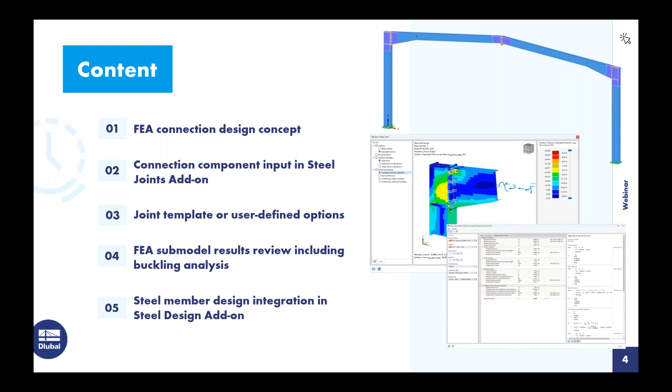So we might be wondering, why would we utilize FEA for steel connection design? Obviously the biggest benefit is going to be the design of non-standard or unique connections. Most likely you have a solution for very basic or standard connections - a lot of software offers this, or even hand calculations. But when we look at this connection over here on the right-hand side with a lot of different components going on, it becomes a little bit more difficult.

So this new steel joints add-on within RFEM allows us to consider the components and the members both in plane and out of plane in one single FEA model. We also can consider complex loading. If we are modeling the entire steel structure within RFEM, we can apply any of the member loads or unique loading scenarios to the structure itself. The member internal forces at the member ends at the joint will simply be used for the connection design, so no need to integrate those member end forces into an external program. Again, everything is done within this single file.

The submodel is automatically generated underneath the hood of RFEM, so this really doesn't require an expertise level knowing how to create these FEA models. They are rather complex, but if you just have a general FEA knowledge, you can go ahead and utilize this capability within the program.

We also will perform the AISC design checks of these connections for our bolts, our welds, and our plates, but we will take it a step further to create a second submodel to carry out the buckling analysis. So we'll be able to view the different eigenmodes and failure buckling modes of this connection, as well as the critical load factors. We'll see that a little bit further in the example today.

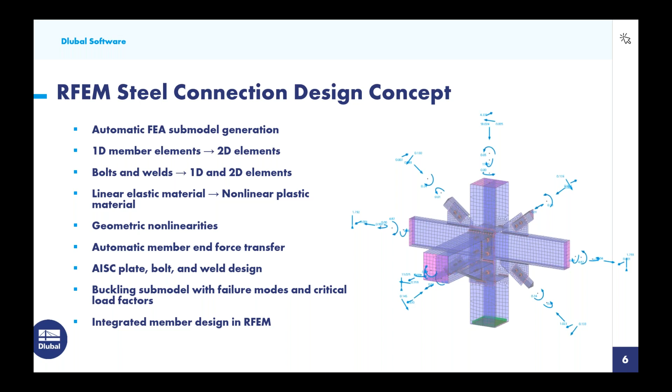And finally, the integrated member design within RFEM. Of course we can get the connection design, but also the ability to design the members themselves - and not just steel, but any material that we offer. So you could combine this connection design with concrete, aluminum, cold form steel, even topics like fabric tensile structures. We could do the steel connection design within that same file.

Okay, so we will begin then in RFEM here with our initial example. When we create a new model, we will give it a model name. The type of model here is going to be in a 3D environment, so although we just have a simplified 2D frame here, we still are accounting for all forces in and out of plane.

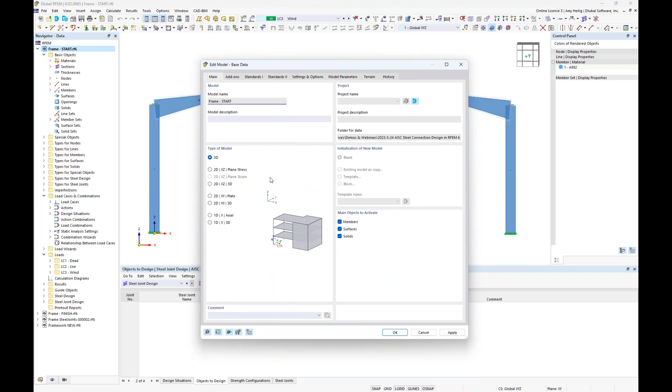Under the second tab, so for those of you who are not familiar with our program, RFEM is the base program. This is where we can fully model, load a structure, and get the full static analysis. But if we want to do a more advanced analysis like dynamics, or we want to do design according to the various standards, this is where we would need to activate these optional add-ons. So you would purchase the add-ons that are specific for your project design.

Now for today, we'll be activating here the steel design. So this carries out the steel member design according to the AISC, and of course the steel joints for our connection design. Under the third tab, we will generate the load combinations automatically according to ASCE 7.

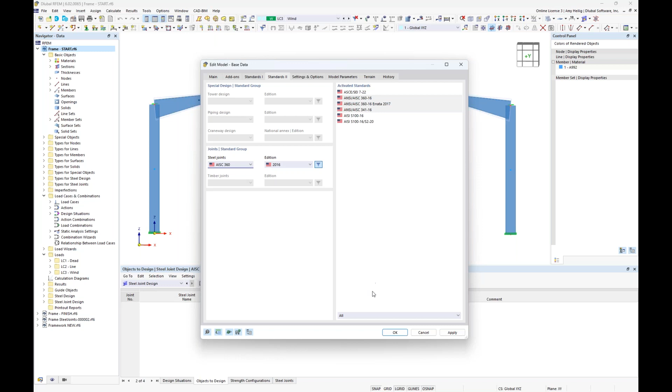We have added the 2022 standard, so that's available here. The steel member design will be carried out according to the AISC 360 2016. And under our fourth tab here, Standards 2, the steel connection design will be carried out also according to the AISC 360.

So once all of this information is input into our base data, as you can see here, for the sake of time, I've already modeled this simple 2D frame here. So let us just quickly go over some of the information already shown. Well, if we turn this into wireframe view, these members, as I mentioned, are just standard one-dimensional elements.

So this is pretty usual for any FEA program, that when we model columns or beams or braces, they're represented by this single line only. But if we turn this into rendered view, we get a better understanding of what this line represents.

Now, we also have here the materials assigned to these members, and currently these are all A992 linear elastic materials. We also have our cross sections.

You can see here the columns are assigned as W14 by 48, and for my beam members, these are W12 by 35s. But I also have applied a small taper at the beam member end.

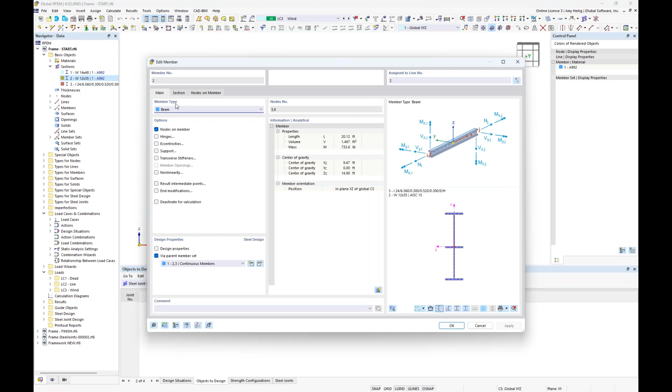So if we double click on this member to go into the beam dialog box, under the second tab here, section, we do have the ability to set a taper at the member start or the member end and other multiple options here. So I'm currently applying this taper at the first 25% of the member length.

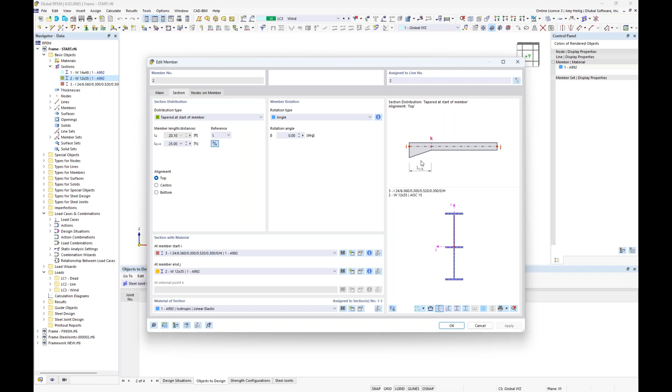And we also can align the taper to the top of the member, for example, and this picture over here will update accordingly. So as mentioned, the beams are primarily W12 by 35, but where this taper occurs at the member start, I took that W12 by 35 and created it as a user-defined section to simply increase the depth.

So that's a little bit about what's going on with our members. Turning this back into wireframe view to quickly explain our support conditions, we have a fully fixed support down here at the bottom, which was applied by utilizing the assign nodal support up here in my toolbar. And also, because we are working in a 3D environment, I went ahead and put some additional spring supports up here only in the lateral global Y direction, to account for maybe additional members framing in to give that lateral stability at the top of our frame.

And finally, we want to cover the loading. So we have 3 simple load cases for today, and we can see these within our drop-down box up here at the top. If I turn on my loads, my dead load is 0.5 kips per foot, applied as a member load.

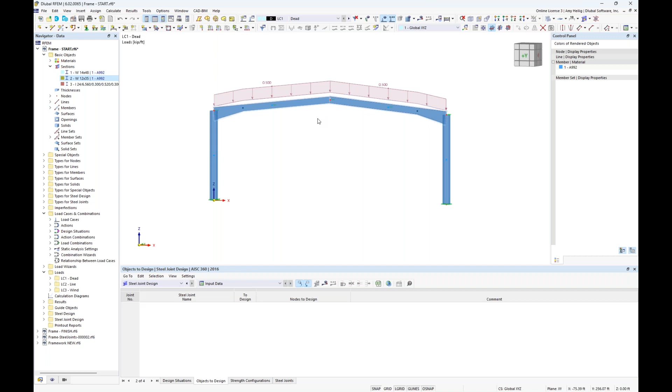When we look at our live load, same concept here, just with a reduced magnitude of 0.3 kips per foot. And then a very simple lateral load here for our wind load case with 0.3 kips per foot at the front side and 0.15 kips per foot at the rear side.

Going into our load cases and combinations dialog box, we will once again see here under our load cases our 3 simple load cases for today: dead, live, and wind. Category was set accordingly to the ASCE 7.

The program is automatically going to generate 2 design situations for us. We have here our LRFD design situation and our ASD design situation. This is really nothing more than just grouping together all of our factored load combinations according to the ASCE 7 for this first design situation. And we can click on this little info button here to see the code references to those load combinations directly.

Now notice that these are used within these optional add-ons that we turned on: steel design and our steel joint or connection design. I will be utilizing these design situations. I'm carrying out my design according to LRFD for today.

Now we also have this second design situation, which is simply grouping together our unfactored load combinations. I'm going to use this for my serviceability checks for my steel member design, but we really don't need it for our connection design because serviceability is not something that we're going to check.

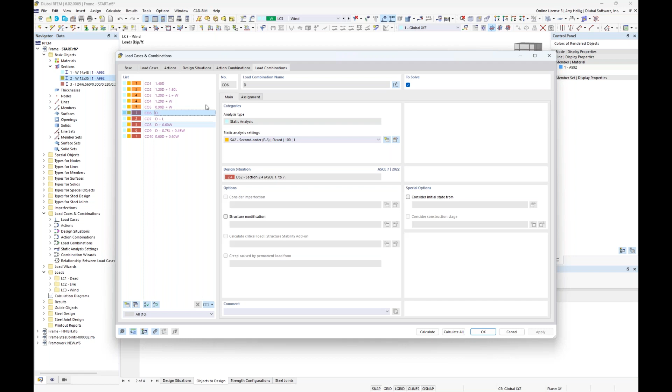And finally, under the load combinations, you can see here the individual load combinations listed out based on the load cases I have defined. All of my factored load combinations are shown here in orange, which belong to that first design situation. And then we have our unfactored load combinations shown in red that belong to the second design situation. So just keep these design situations in mind, we'll come back to them a little bit later on.

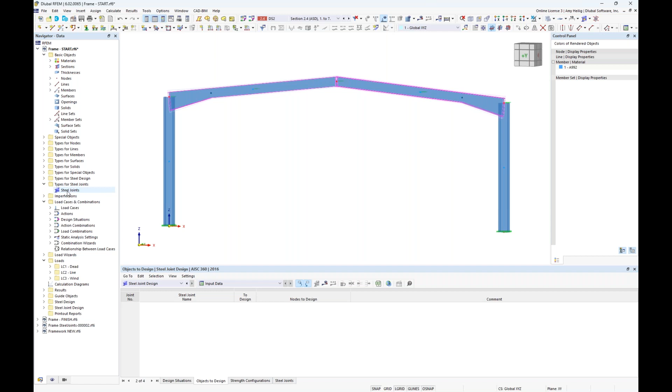So now that we have fully reviewed this model, let us begin by defining our first connection. So because I have activated the steel joints add-on under my base data, we now have a folder option over here on the left called types for steel joints. Well, currently this is empty, but I can right click to create a new steel joint.

And initially, I want to select the node that I would like to apply my first connection. So we can graphically select node number 6, or I could directly input the number here into this dialog box. Both of my members were automatically brought in.

Looking at this second tab, remember that we are going to extract out this submodel for our connection design and run it completely separate from our steel frame that's happening here in RFEM. Because of this, we need to fully support one of these members in that submodel, so we'll go ahead and utilize the support for the beam over on the left.

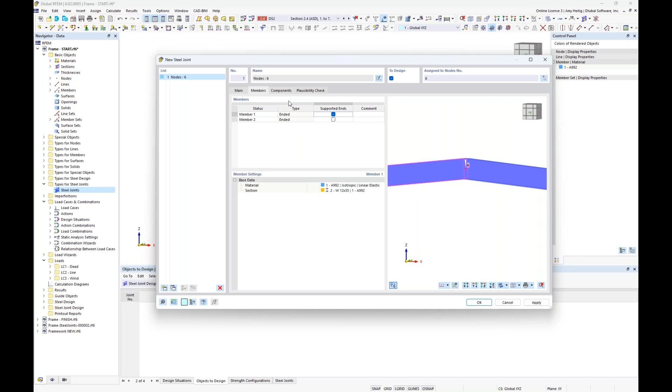Now the type is set to ended. This only means that if all of these members simply end at this connection, then the type would be set to ended. In another scenario where we maybe had a continuous column passing up through here, but it was modeled as two separate members back in RFEM, then we would have an additional type option available in a dropdown called continuous. Under the Components tab, this is where we begin to build up our connection components.

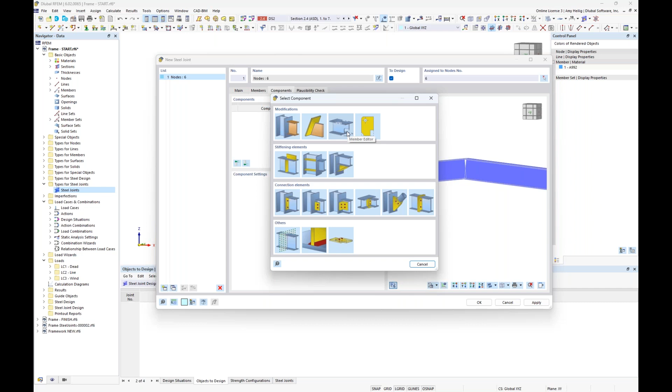We could certainly individually do this with our connection database, our component database. We see each one of these components that we can individually input, such as end plates, fin plates, cleats, or maybe plate-to-plate connections for beam splices. We also have stiffeners and haunches, and then some additional modifications that relate more to the geometry, so we can make member cuts, or add in openings or notches into our beam elements.

But rather than inputting in these individual components, we could also take advantage of our library options. Within these joint template library options, we have 4 general categories, including rigid connections, pin connections, truss connections, and brace connections. Beginning here with the rigid connections, we have additional subcategories such as beam to column, and so on, and within these subcategories, we have additional template options.

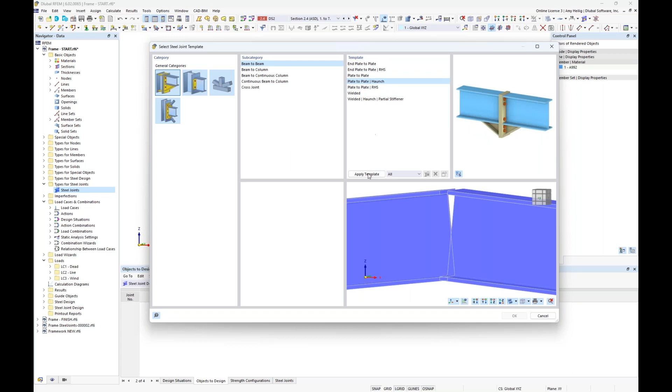So looking at beam to beam, we have an end plate to plate, and an end plate to plate with a rectangular hollow section. For today, we're going to utilize this option: plate to plate with a haunch. When I click apply template, it's automatically going to apply these components from this library to my specific members within my RFEM model. So I can click OK, and now we see these individual components listed out and applied again to the members within the RFEM model background.

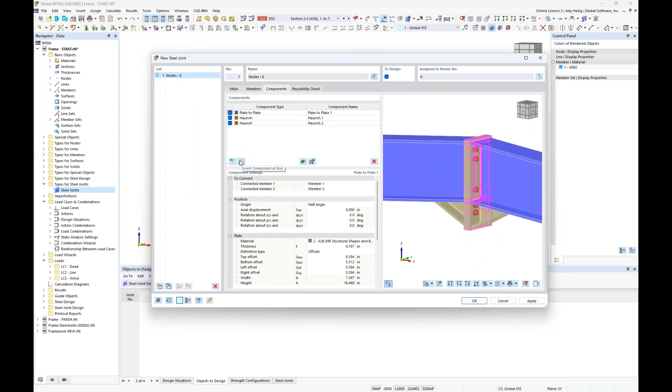Now, we could certainly add on with the individual components and just use the library as a starting point. We'll certainly need to make some modifications to our geometry, but once you have your connection set and you utilize this connection quite often, it's always recommended to save it under your own user-defined template. You can give the connection a name, set the filter categories and subcategories, and now that connection will always be available for any future RFEM model. That could certainly be helpful if you don't want to redefine the geometry changes or components every time.

So starting off with the first component, you can see here it is plate to plate. We are connecting both members 1 and 2. We can make modifications to the position, but we'll go ahead and leave all of this as default. Now we do need to define the material of these plates. I already have A36 defined within my RFEM model, but if you did not, you could just access our material dialog box with these 3 buttons here.

Within the material dialog box, we can further activate the material library. Over on the left, utilizing our filters to steel, to the AISC 360, then we could go ahead and choose whichever relevant steel material we'd like for this particular component. Again, utilizing the A36 that's already been defined, I will modify here the thickness of my plate. So we can go ahead and change each plate to 0.5 inches thick for a total thickness of 1 inch.

And now we need to define the plate offset. The offset just means what is the distance from the top of the plate to the top of the flange, and then the bottom of the flange to the bottom of the plate, as well as left and right. So starting off with the top offset, I'm going to modify this to actually a negative 0.375 value. I'm going to drop this plate down below the top flanges here on my beam in the event that we have some type of sheathing material that we don't want it to interfere here with these plates.

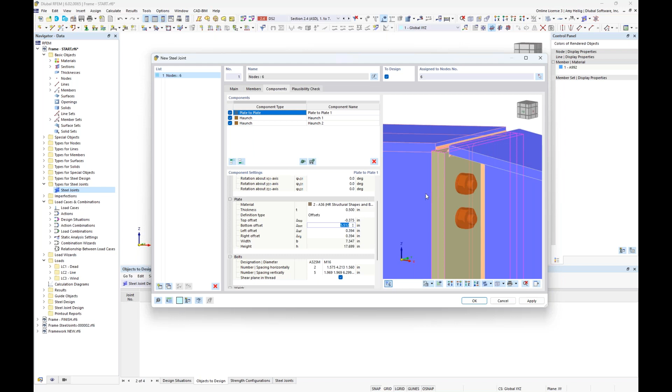As far as my bottom offset, we'll modify this to around 5 inches. Then we have the offset on the left and right, which I'll set at 0.5 inches for the left, hit enter, and 0.5 inches on the right. Now the dimensions of the plate will automatically update here.

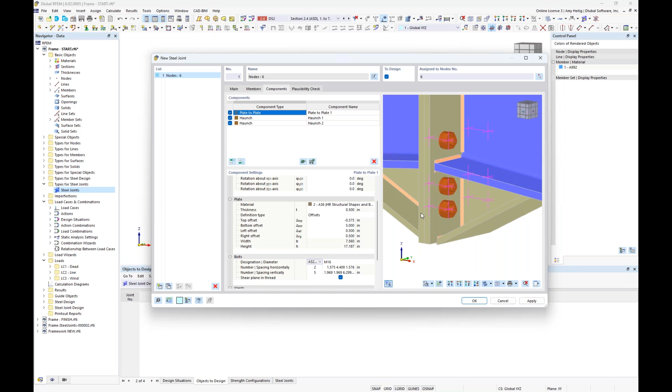Next up is our bolts. We have here the designation of the bolts within our dropdown. We'll select A325, and in the dropdown box next to this we can select the diameter, choosing 3/4 inch diameter for our bolt layout today.

Then we have the number of bolts in the horizontal direction as well as the spacing. Currently we have 2 bolts in the horizontal direction, one on the left and one on the right, so we'll stick with a total of 2 bolts. The input in our second column is simply the horizontal spacing. The first spacing to input is the distance from...

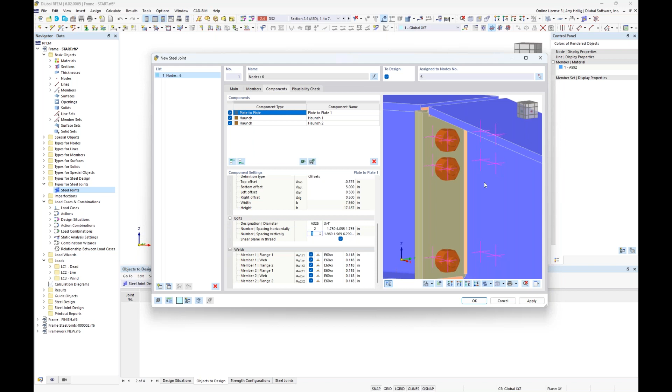...the edge of the plate to the center of the first bolt, so I can input 1.75 inches and hit space. The next distance is from this bolt to the bolt on the other side, which is 4.055. If I hit enter, the program is intelligent enough to set the additional dimension from the center of the bolt to the edge of the plate. Keep in mind the program will attempt to center these horizontally, so you may not need to make changes, but if we want to adjust that spacing, this is how we'd do so.

As far as the bolts in the vertical direction, currently we have 5 bolts, but I'd like to reduce this to 3 bolts instead. Once we update this, we need to adjust our spacing.

So we have the vertical spacing. The first input option is from the top of the plate to the center of my first bolt, which will be 3.5 inches. I hit space. The next spacing is from this first bolt to the second bolt, which will be 5.5 inches. I hit space again, and lastly define the spacing between bolt number 2 and bolt number 3 as 5 inches. I hit enter, and the program will populate the last spacing from our bolt down to the bottom of the plate.

Now, is the thread located in the shear plane for our bolts? If so, we leave this option turned on. If not, we uncheck it.

And finally we move on to the welds. We can see these welds are labeled within this first column, but as I scroll through them they're also highlighted graphically. If I didn't want to apply any one of these welds, I could simply uncheck it here, and that weld would be taken away from this particular connection.

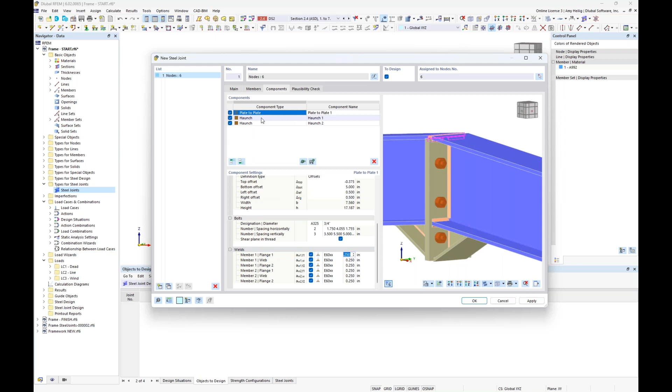That sums up our first component and any of those geometry changes. We now want to move on to our second component, which is a haunch. We see it's highlighted over here on the left-hand side, and we're currently referencing member number 1 and the particular web.

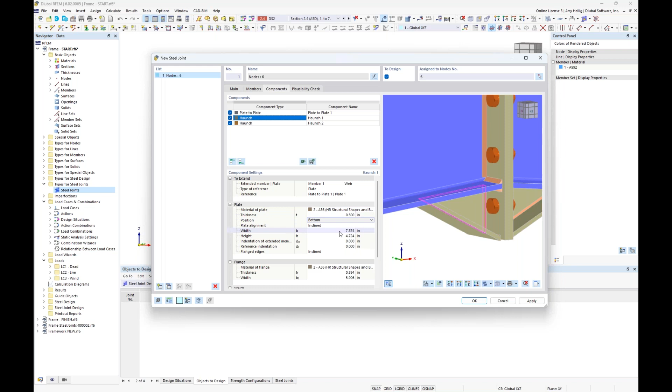And we want this haunch to be extended to our plate shown here. The material is set to A36. We do want to modify the thickness to maybe 0.5 inches. We can also modify the width and the height. So I'll modify the width to 12 inches, and we should see that graphically displayed here. The height is going to be 5 inches. And you'll also see that the program automatically included a flange here as part of my haunch.

If I wanted to get rid of that flange, I could go ahead and use my drop-down box here to select the no option, and that flange should disappear.

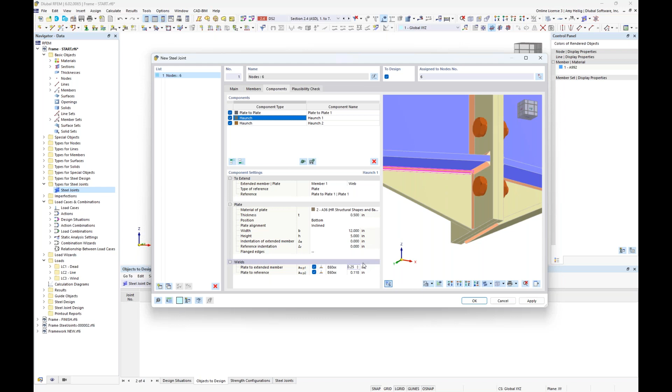Now, finally, we have our weld input for the haunch itself, and we have two welds, which we'll leave as a default double fillet weld on either side. Our first weld is on the underside from the plate to the bottom flange, where we will modify the throat thickness to 0.25. Our second weld is from the haunch to this end plate here, which again we will modify that throat thickness to 0.25 as well. So looking at our haunch on the left-hand side, we're complete with this second component.

We move over here on the right-hand side, and we want to make those exact same changes that we just did to the left-hand side. So we'll modify the thickness to 0.5 inches. We want to modify the width to 12 and the height to 5 inches. And then we will also want to select no flange here in our drop-down. And finally, we will modify the throat thickness to 0.25 for both of those input options.

So realistically, this connection is now complete. And again, if you utilize this connection quite often, save it to your user-defined library so you can pull it open with these modifications already set.

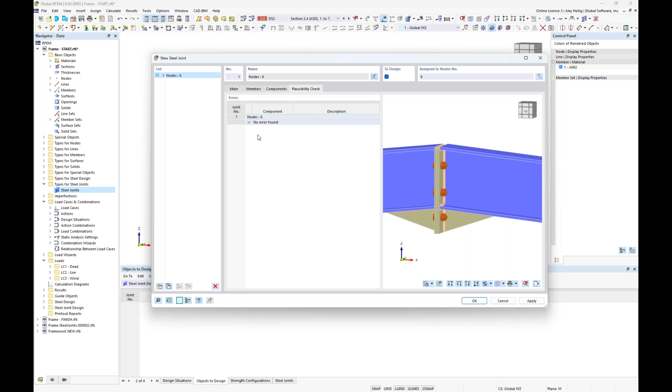The final thing to do with any connection is to check out this fourth tab, the plausibility check. So we see here it's a green checkbox with no errors found. If we had any issues, such as maybe bolts overlapping welds or plate elements, or maybe a weld extending beyond a plate, these would all be flagged here so that we could take care of those errors before we move forward with the calculation.

So now that this connection is complete, we can click OK here. And what we should see is that graphically, we're going to represent this connection here within the main RFEM model.

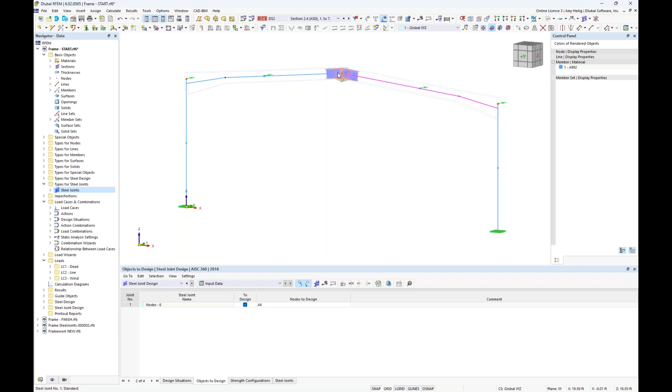Now, to explain a little bit further about what's going on, you'll notice that when I turn this to wireframe view, we still have those one-dimensional members. Notice that these members are still framing from node to node. We're not going to cut off this one-dimensional member where this connection starts. Really, this is just a graphical display of that model that will be acted out and completely calculated separately from this RFEM model. But it is nice to view in a little bit more detail exactly what's going on.

Also keep in mind, a common question is that the member end forces for this beam will actually be taken at this node. They are not taken at this distance away where the connection will begin.

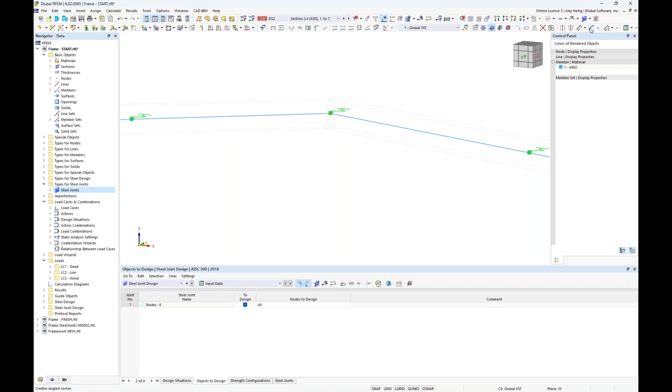Going back then into the rendered view, we can see this connection here with all of the available components, the geometry changes that we just input. Now, with the display of our connection, we also have an additional option up here in our toolbar where we can completely hide that joint model with this dropdown if we're not interested in seeing it. We also have this simplified joint model, which is just represented by some box type symbols here. And finally, we have the detailed joint model, which is currently default and turned on.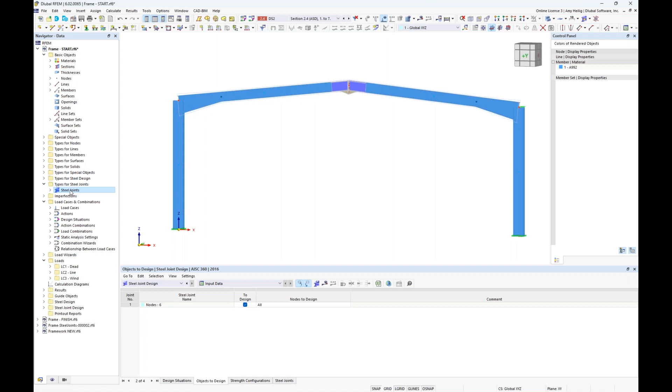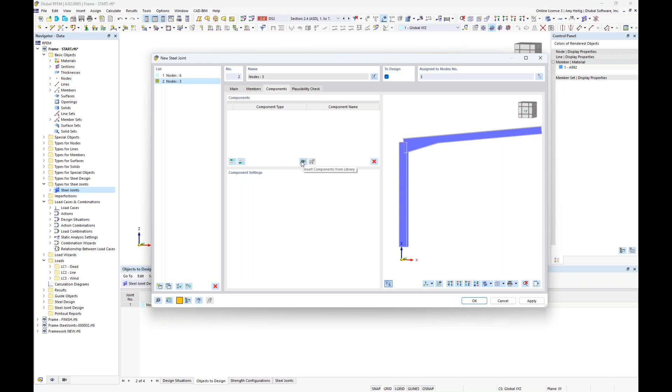So now that we have defined this first connection, we would like to move on to our second connection, which is going to be the tapered beam to the column. So we can again right click over here in the types for steel joints to create a new steel joint definition. We want to graphically select node number 3. I click OK. The two members are automatically imported here, and under the second tab, if you remember, because we're creating that FEA submodel, at least one of these members needs to be fully supported. So we'll go ahead and leave the column as fully supported. Under the components, we will take advantage of our library option here.

And this time under our rigid connection, we want to modify this to a beam to a column. Within the additional template options, there are many different options, including cleats, maybe an end plate. For today, we want to utilize the column with stiffeners. I'm going to hit apply, and yet again, we should see these individual components applied directly to my model.

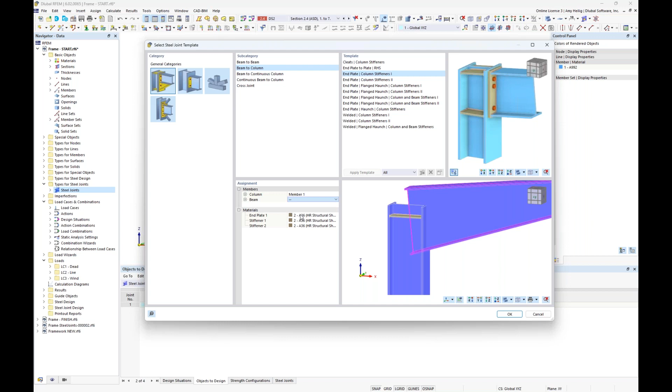I think we could all look at this connection and agree that this certainly does not look correct. This is really just an issue of the program not knowing which member is the beam versus which member is the column. That's controlled with our options on the left. So in our dropdown for our column, we want to change this to member number 1, and our beam element we want to specify as member number 2. Now this connection should look quite a bit better. So we click OK.

Just like what we saw with our previous joint, we will now see all of those components individually listed out here. Let us begin with the end plate. You can see here with the end plate, we are taking member number 2, which is that tapered member, and connecting it to the reference member number 1. Steel A36 will be utilized for the material. If we want to modify the thickness, we can input this as 0.75.

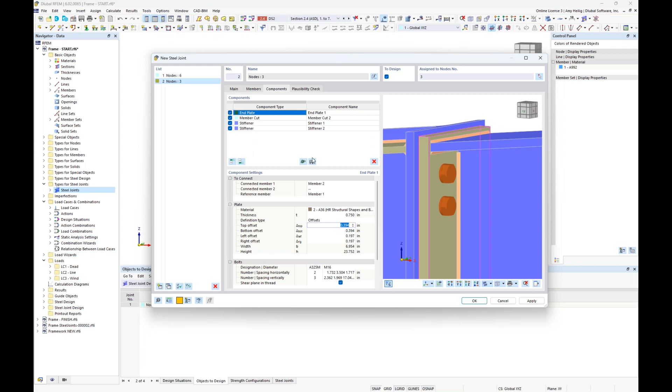Very similar to our last plate element, we would want to define the offsets. Looking at our top offset, remember the top of the flange to the top of the plate, we'll go ahead and modify this to 0.5 inches. When we look at the offset at the bottom, we will modify this to 1 inch. And then we have an offset on the left and right hand side of those flanges, and we'll set this as 0.25 on the left and 0.25 inches on the right.

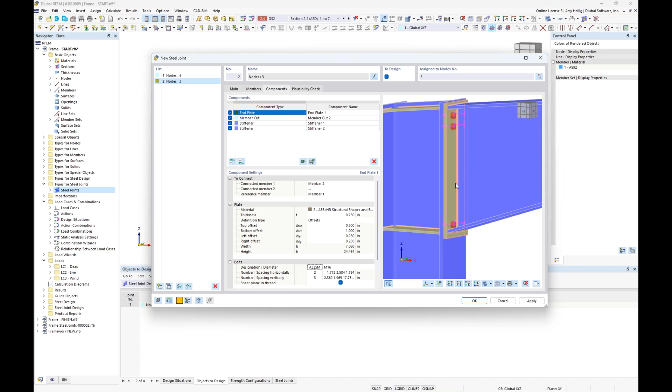Now looking at our bolts, again, clearly we need to make some modifications here. We will be selecting A325 from our dropdown. The diameter of the bolt is going to be 7/8 inches. We are going to leave this as 2 bolts on either side, so 1 bolt on the left, 1 bolt on the right. The program has centered these, so I will leave these as default options now.

As far as the vertical bolts, currently we have 3 shown, but I want to increase this to 4. Once I input the 4 bolts, we'll make some modifications to our vertical spacing as well. The first input option is from the top of the plate to the center of the first bolt in the vertical direction, which will be 3.5 inches. I hit space on my keyboard. We now need to define the spacing from bolt number 1 to bolt number 2, which will be 5.5. I'm actually going to apply 5.5 inches to the additional spacing 3 times between all of these bolts. I then hit enter on my keyboard, and we see all of those update graphically here.

We'll leave the shear plane and thread turned on. And finally, we have our welds. So we have the weld at the top flange, again leaving the fillet weld on either side as default with E60 strength. We'll modify the throat thickness to 0.25 once again. We take a look at our weld at the web here, and we'll go ahead and modify this throat thickness at 0.25, and we do the same thing for our weld down at the bottom, modifying this thickness to 0.25.

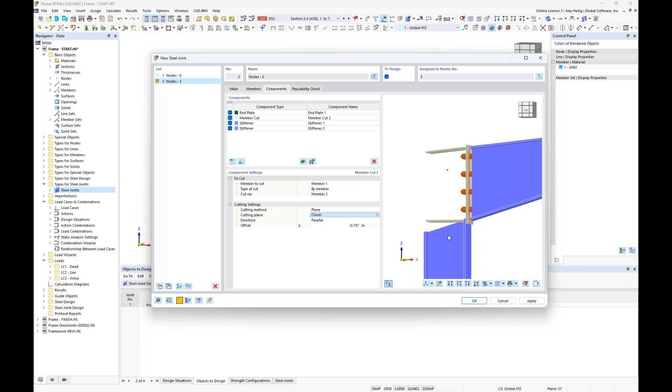When I set this to closer, notice that the column is automatically going to be cut off here at the bottom flange. But when I use the option farther, we'll extend that column to the top flange instead. Additionally, the cut of this column is matching the incline or pitch of my tapered member shown back here in this 2-dimensional frame.

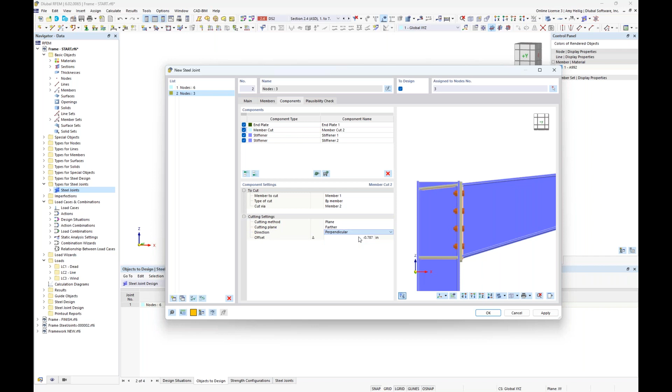If we want this column to be completely straight across, we can use our drop-down options here to choose perpendicular instead. Now notice that column is cut straight across, not considering that incline. We'll match that pitch by changing this back to parallel, and now that will match again the top flange of my tapered beam.

We also have the ability to set an offset. If I have this offset set at 0, it simply makes that member cut match the top flange, or I can set this offset to negative 0.75 inches, which will extend it slightly above the top of this beam. That's all that's needed for our second component.

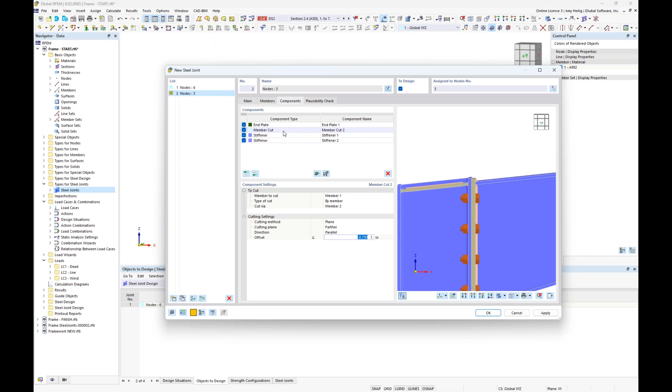We now want to move on to the stiffener. We see this stiffener applied, and the stiffened member is referencing member number 1, but we want to apply these stiffeners based on referencing member number 2, the beam. The material is A36 once again.

Perhaps we want to modify the thickness to 0.5 inches. And we are applying these stiffeners based off the member plate flange number 1 here of our beam, so everything is parallel to that top flange.

Alternatively, if I didn't want it to be parallel, I can make it perpendicular so that we have the stiffener going straight across. Of course this doesn't make sense here because our column isn't extended up high enough, so we'll go ahead and change this back to parallel.

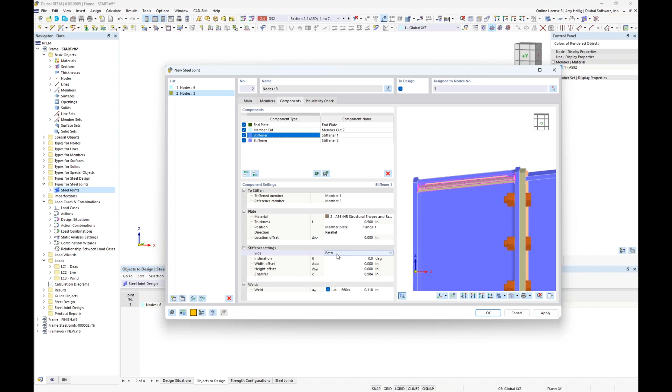We could also add in an offset to move the stiffener up or down. We also have the ability here to set the stiffener on both sides, or within this drop-down option, we could choose just the left or just the right.

And finally, as far as geometry, we have a small chamfer here, so we want to set this dimension to 1 inch exactly.

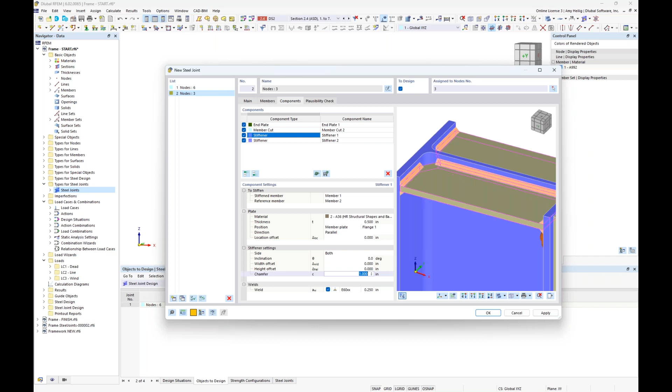Finally, we have the weld. Just like what we saw with our other weld input for our additional components, we're going to leave this as a double fillet weld, E60, with a throat thickness of 0.25. This is just connecting that stiffener back to the column.

Now we also have our last component here for our stiffener shown here at the bottom flange. Again, if I didn't want to account for it, I could just completely turn it off, or if I wanted to delete it altogether, I can use this red X.

So I make sure that I'm selected here under that particular component, and I delete it altogether. The reason I wanted to show you is that we have a nice feature here for existing components: if we right click, we can copy the component to the end of this list. This is a huge advantage if we've made a lot of modifications to our component and don't want to input all that information again; we just simply make a copy.

Now currently the second stiffener is sitting right on top of the first stiffener, so that's not ideal. But what we can do here is simply move it by referencing, instead of flange number 1, flange number 2, which is highlighted here as I select it within my dropdown. Now currently it's set to parallel, so it matches the angle here of that taper.

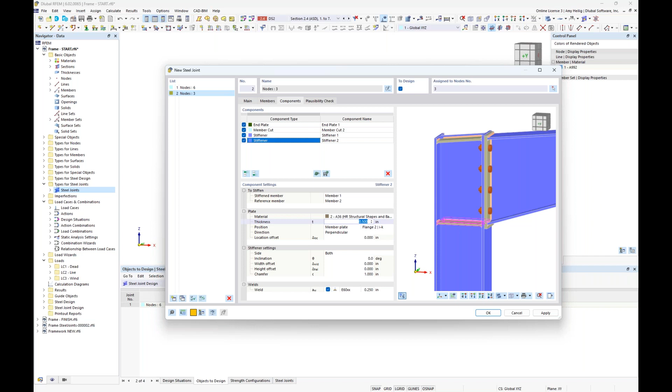But if we wanted to modify this to perpendicular, we can do so. Now we see that stiffener shown here at the bottom in the perpendicular position. And if we wanted to modify the thickness to something smaller, we could do so here at 0.375.

So now this fourth component is now complete. Again, checking the plausibility, no errors found. That's great—if we had any issues with geometry or anything else, the program would notify us here.

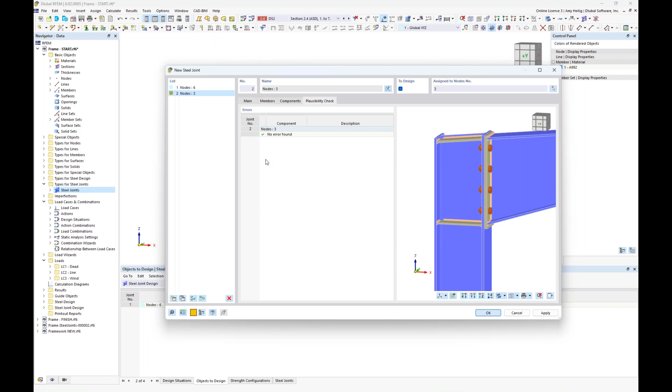So when I click OK, we should now see this connection applied over here to the left-hand side. And what you will notice is that we actually want to apply this exact same connection here on the left-hand side to the right-hand side.

Rather than redefining all of those additional components and a new steel joint, the program's intelligent enough that I can go back to node number 3 here, my connection that I just defined, and in addition select node number 11.

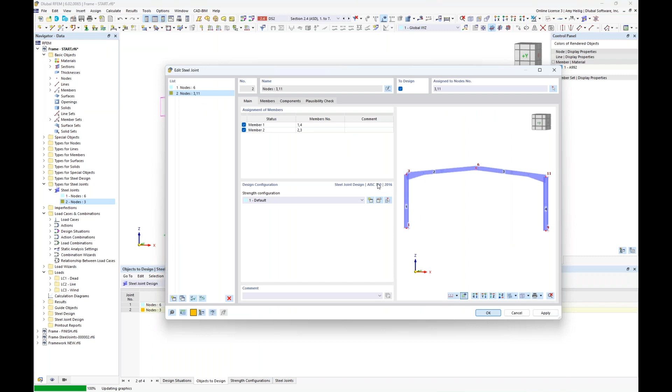And I click OK. So we have an identical layout for our joint template here. It's just simply the mirror image of the other side. So if you have the exact same connection details, but it's just slightly oriented differently within the model, you could certainly apply multiple nodes to the same joint definition.

All right, so we are almost ready to move forward with our analysis and design. But one thing I wanted to cover before we do: if we go back into the steel joints and edit the dialog box, this brings us back into the dialog box we've previously been in. You'll notice here there are design configurations, and one option for strength configuration with a default setting already specified.

The strength configuration, if we edit this, is specific to the AISC design of our connection, but also to that submodel that's generated underneath the hood. We have to assign a configuration to each of these joints, and you can also create different configuration settings for different joints.

Taking a look at the default option shown here, you'll notice the first option for my connection design is to also perform a buckling analysis, so we can go ahead and turn this on. Now, I want to let you know that you have to own the stability analysis add-on in order to carry out the buckling analysis in addition to the actual AISC connection design. If you want to take it that step further, you need to own the stability analysis add-on.

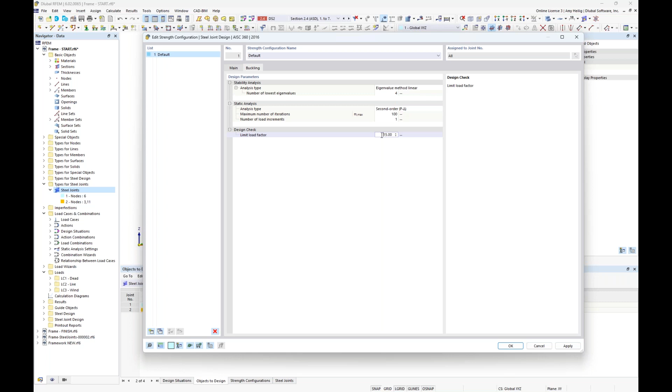Second order analysis is considered, and finally we have the limit load factor. This is a user defined input option, and it all relates back to that critical load factor. When the critical load factor falls below 15.0, the program will flag you that maybe buckling is a consideration you need to look at further for your connection. Again, you have the ability to increase or decrease this factor—it'll make more sense once we look at the buckling results.

Going back to the main tab, we have our resistance factors for LRFD design straight from the AISC standards, safety factors for ASD, and a lot of this information down here at the bottom is specific to the FEA submodel and mesh generation. The FEA mesh back here in RFEM for our overall structure is most likely entirely too large to apply to this much smaller submodel, so we will submesh that to something much smaller. We have some default options shown here, but you can always come in and modify the FE mesh settings for that submodel.

Now, one thing I do want to go into a little further detail on is the limit plastic strain. You'll see this input is set by default at 5%. So let us go back to the PowerPoint to discuss this in a little more detail.

By inputting this plastic strain limit, this is going to be used for the strength limit state criteria for all surfaces. What I mean by surfaces: remember that our one-dimensional members for our beams, our columns, these are all converted to 2D surfaces. So our flanges, our webs, our end plates, haunches—all of these are now 2D surfaces.

We're probably utilizing a linear elastic material, but the program automatically converts this to a nonlinear plastic material. With this material model, we reference the von Mises yield criterion stress failure hypothesis. So when we look at the general stress strain diagram of a steel material, shown here at the lower right, we certainly have our linear elastic region shown here before we reach that yield strength Fy.

Once we reach Fy, we are in the plastic region. Ideally, steel behaves more like the red line shown here for the physical stress-strain curve. But for our nonlinear material model, we simplify this into just a simple line element. The modulus of elasticity is the slope in our linear elastic region, but in the plastic region, we assign a plastic modulus of elasticity, which is the linear elastic modulus of elasticity over 1,000. This is just a simplification we take with that nonlinear plastic material model.

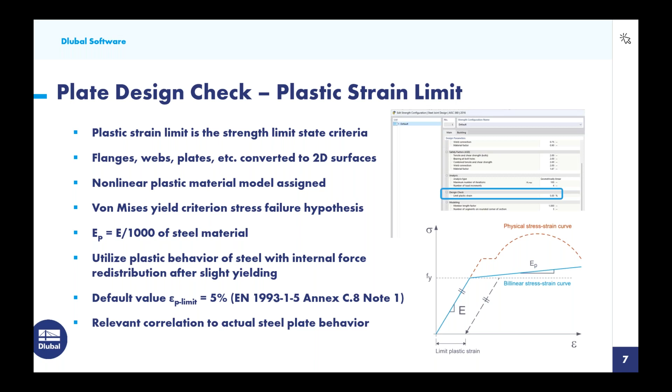Overall, there have been studies done showing there really is good relevant correlation to the actual steel plate behavior by limiting the plastic strain instead of the stress. So that's what's going on here within our design configuration for all plate elements. This is the only check that we will carry out, by limiting that plastic strain.

Once this information is all input into our configurations, the final thing to do is go back to our RFEM model and jump down to the steel joint design add-on. Within this add-on, in table format, we have our two design situations, which we covered earlier. We have our LRFD design situation where we set this to the strength limit state for LRFD design. Alternatively, if carrying out ASD design, it would look similar, using the dropdown to carry out the second design situation for unfactored load combinations according to the strength limit state for ASD design. I'm carrying out LRFD design today, so we'll utilize that first design situation.

The objects to design, we will be designing all three connections here, and in a similar workflow, also have the steel member design. I did an entire webinar devoted entirely to the steel member design according to the AISC, which goes into much more detail than what we have today. My point today is just the ability to design the members along with the connections.

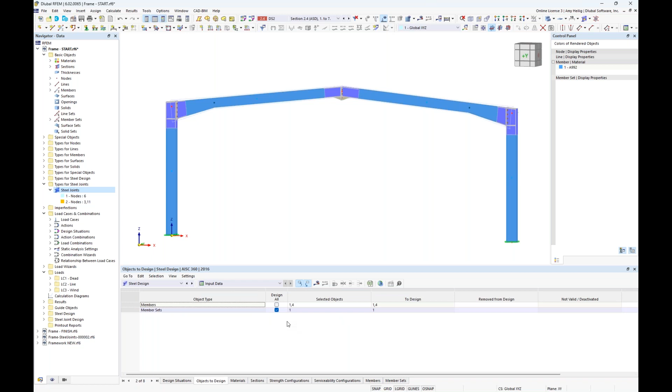Once we have input this information into the table, we are now ready to go to calculate all. But keep in mind, because we are now introducing these FEA submodels, it does take a few minutes to solve, so it will take a little bit longer than if we just had these steel 1D members alone. For the sake of time, I'm going to open up an already saved model here that has carried out the calculation.

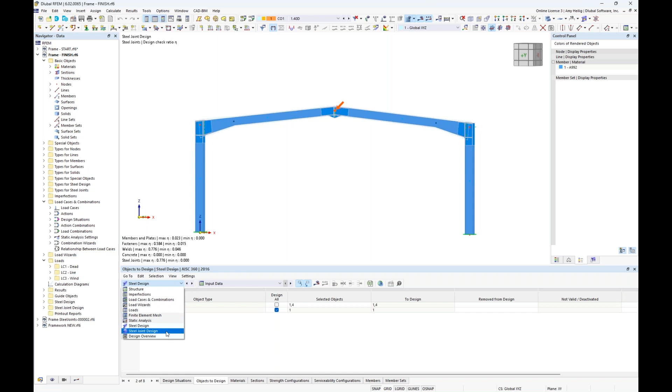Well, what we should see once we run our analysis and design under the steel joints table here is our results. We can view the stress strain analysis design ratios by node. You'll notice here that I have 3 design checks for each connection, including the plate check, the bolt check, and the weld check.

Within any one of these specific design checks, such as the bolts here, I can go ahead and activate my design check details. This is true for both the bolts and the welds, but we'll take a look only at the bolt elements. I'll expand out my options on the left-hand side, use my control key, and zoom in here to these equations so hopefully those are a little easier for you to see.

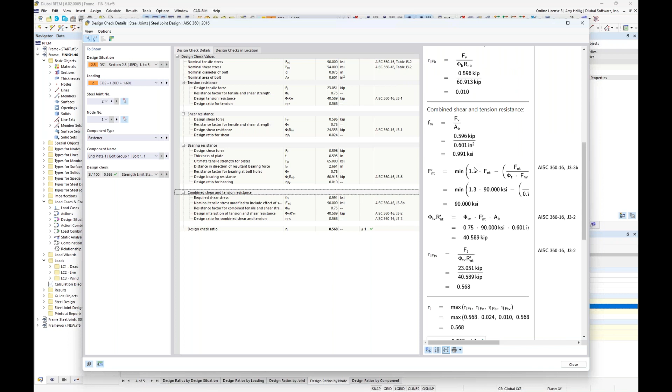We are checking the bolts for all scenarios carried out by the AISC, including tension resistance, shear resistance, bearing, combined shear and tension, and so on. We take the max design ratio out of all of these and present it to you as that design ratio. All of the code references are given here, all of the formulas line by line, and the variables are listed out. You can add this information to your printout report, so we're trying to be as transparent as possible about where these specific checks come from.

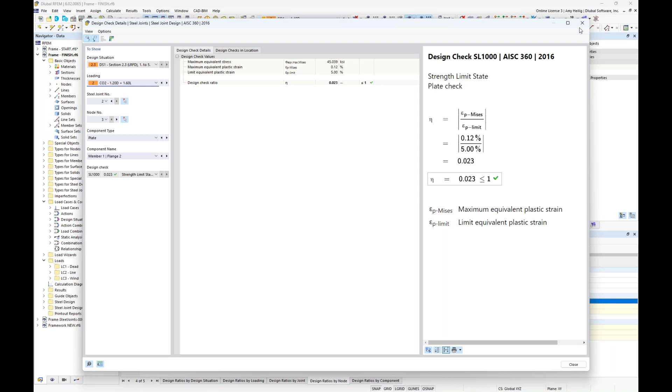Same concept for our welds. If we look at our plate check, this is currently for my connection shown here at the left and the right, which you can see are highlighted. I'll open up my design check details, and you can see this looks quite a bit simpler. This just goes back to the PowerPoint slide we covered, that for all of our plates - flanges, webs, end plates, haunches - we're only going to check this limit plastic strain. We have the limit plastic strain set at 5%, and then we have our plastic strain from the actual analysis, and we ultimately get a design ratio. So that's going to be a little different here for our plate checks versus the bolts and welds.

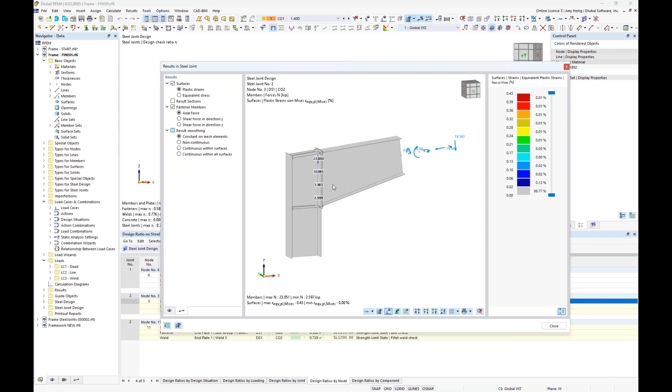In addition to the design check details, we also have the ability called results in steel joint. We can activate this, and it will show us our submodel of this particular connection. We're currently looking at the tapered beam to the column connection. If I scroll to my second tab, we are viewing the plastic strains for this connection for load combination number 2. At first it really doesn't seem like much is going on - that's because we gray out the strains that are probably not of much interest - but we do see some higher strains here at the top of the connection.

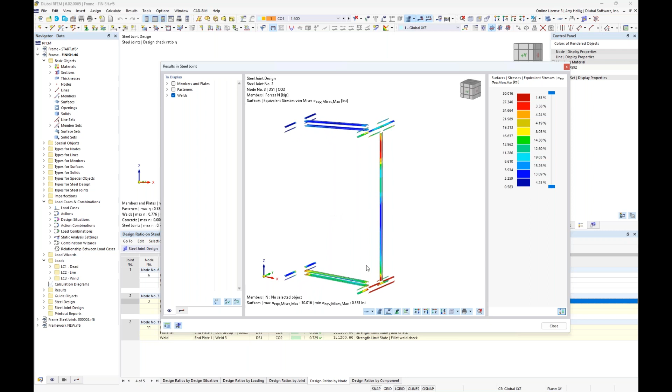Alternatively, we can toggle this to the stresses instead, and this might look a little more interesting - we can actually view the stresses for all of our components graphically. Of course, where we saw those higher strains, we're also going to see those higher stresses. Going back to this initial tab, if I collapse these display options, I have the ability to turn off completely my members and plates and maybe my fasteners, and now view the stresses just on the weld elements themselves. Or if I'd like to turn on the bolts, I can activate the fasteners, and we see the tension forces in kips given to us graphically. Finally, going back to the display of all these options, we return to the stresses shown for all components.

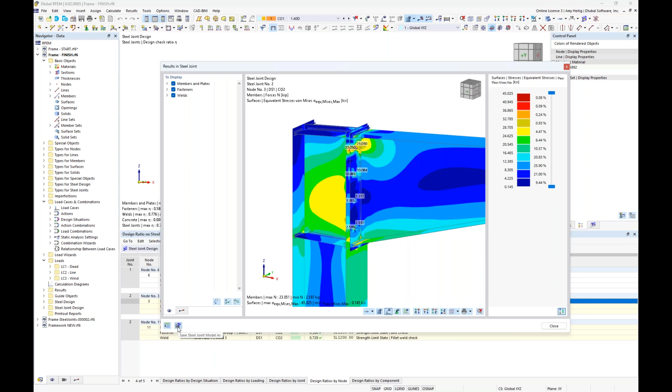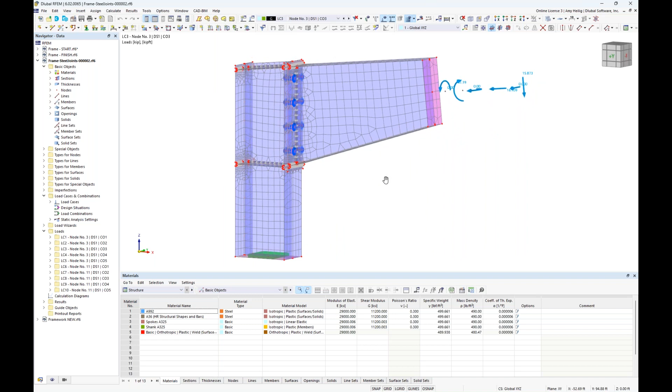In addition to viewing this information, we have the ability to save this model to our computer, and when we save it, we can open it up like any other RFEM model. I went ahead and took the liberty to save that particular connection to my desktop so we can see what this model actually looks like, that's all being created underneath the hood automatically for us. Here is our exact same connection with the FEA model shown in detail. Notice that the web elements, the flanges, everything was converted to these 2D surfaces. If we turn this into a wireframe view, you'll see here everything is meshed automatically for us.

Perhaps if I go back to my navigator here to turn off the mesh, we can look at our weld elements. These weld elements are a mix of 2D surfaces in order to get the stresses, but we are also transferring forces between the weld and the plate elements with these small rigid links. We also have our bolt elements.

I had mentioned some of this in the PowerPoint, but if we double click here, we can actually see that these bolt elements are represented by a standard beam element. The cross section is also taken into consideration, the diameter of our bolt element that we've set, as well as the material.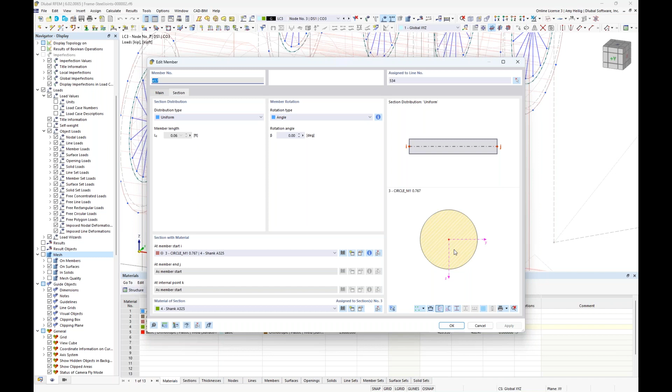We are going to transfer the forces in this opening where the bolt is passing through with what we call these spoke members. These spoke members are nothing more than beam elements themselves with a cross section assigned. Everything is optimized here with the cross section and the number of spoke members in order to transfer those forces between the plate element to the bolt and vice versa.

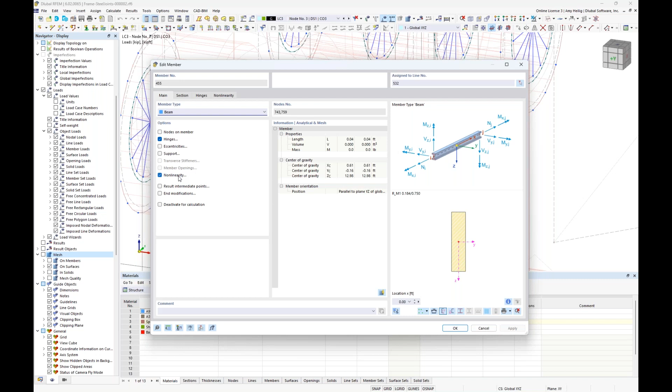We also have a nonlinearity applied here for this beam spoke member that it will fail in tension. So we really want this bolt to bear onto the plate element when it's in compression. But if we have any tension between those two elements, that connection will fully fail.

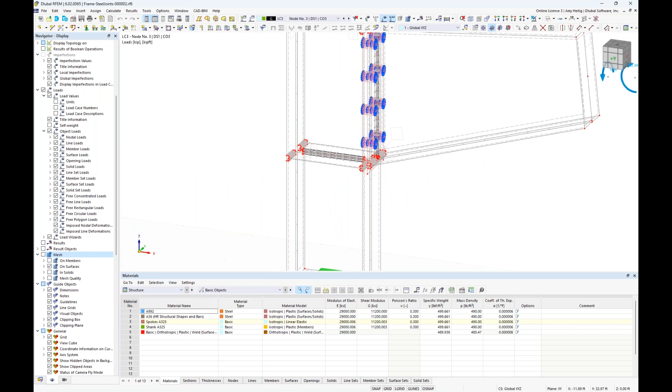So that's what's going on a little bit underneath the hood — it's really just putting together all of these different elements into this FEA model. And by all means, you have the ability to manually create this same exact connection. We're just taking it a step further with giving you the ability to automatically generate this pretty complex model underneath the hood.

A couple more things to touch on if we take a look at the materials. All of the materials are listed here for our beam elements, and I'll turn this into a rendered view — A992, A36, and even our bolt elements and our welds have the relevant material. But you will see that these are now converted to plastic material models rather than that linear elastic.

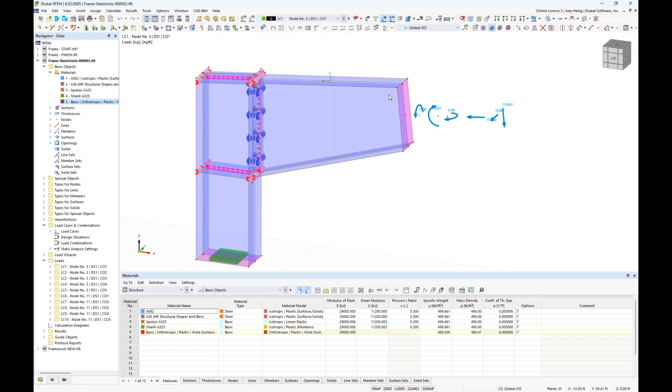Finally, if we take a look at our drop down about all the different loading scenarios here, these are our ASCE 7 factored load combinations that are being applied here to the member end. As I scroll through these different load combinations, we should see these loads update automatically.

They're applied here to a rigid plate, so this rigid plate allows the load distribution across the entire face here. So we don't have to worry about topics like singularities because this load is distributed again to the entire face of these elements. And remember too, that we had to set at least one supported member — we can see that support applied here at the bottom of the column.

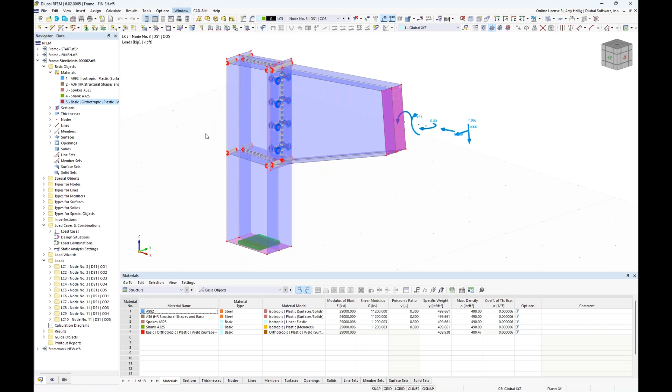Okay, so that will cover just the submodel. Let us go back to our frame quickly to talk about the buckling behavior. In addition to the design according to the AISC, if we go back to the steel joint design, we have an additional drop down here for the buckling analysis.

Looking at the buckling analysis results in table format, we are calculating 4 eigenvalues here for each connection as well as each load combination. As we scroll through these, it should highlight exactly which connection we're looking at. You'll also see our critical load factor. If you remember, under the configurations, we told the program to flag us if this critical load factor falls below 15.0. So what is a critical load factor?

Well, if we're currently looking at our connection here, and load combination number 2, the critical load factor is the value or the factor that you can multiply your loads in load combination 2 before you're going to see some type of buckling behavior.

So when we are getting down around to values such as 1.0, this is a very big problem. Anything less than 1.0, the connection cannot handle 100% of the loads before we're going to see buckling. So again, we can kind of set that user-defined value of when to flag us for that critical load factor.

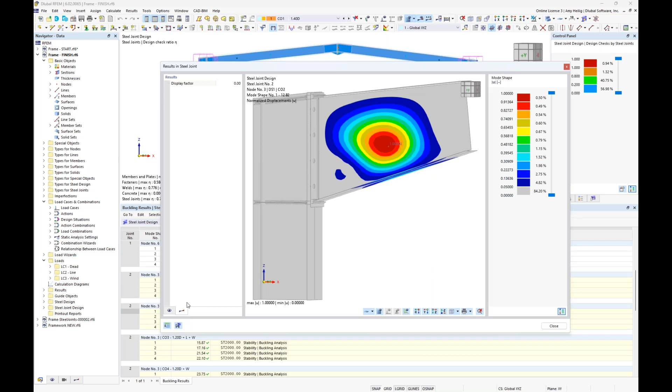What might be interesting too, in addition to the table format, is to again launch the results in the steel joint here. It will look similar to before, but with a slight modification: now that we're viewing buckling behavior, instead of stresses and strains, we're viewing the eigenvalue, or eigenmode. We can see that under load combination number 2, with a critical load factor of 12.82, we might be concerned with buckling within the web of our tapered member.

If we scroll back up to our center connection, we'll launch the display of the buckling behavior. Notice this critical load factor is much higher for load combination number 1, at 31.09. But in this case, we might be more concerned with the initial buckling of our flanges, with a secondary concern of these web elements for that center connection.

So buckling is certainly something that is not easily accounted for with hand calculations or analytical calculations for connections. We have the ability here to carry out this additional analysis and determine if buckling is a concern, whether we need to increase the thickness of surfaces like web members or flanges, or add additional stiffeners with those component input options.

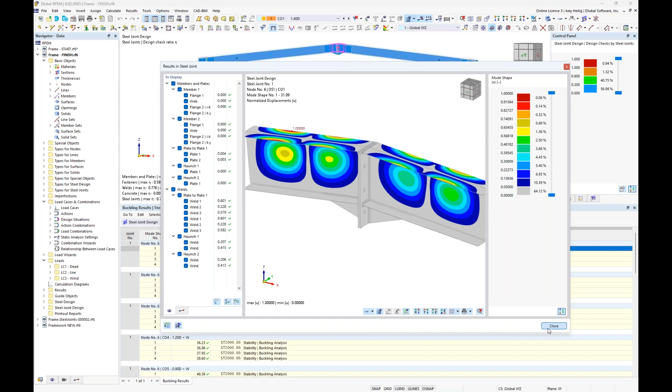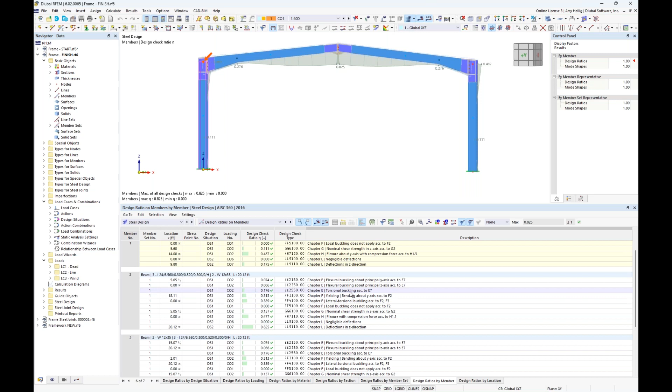That sums up the connection design, but keep in mind we also did the steel member design. We can view the results within our table format here, with design ratios for each member. Just as with any other steel model, we get full design according to the AISC, with calculations carried out for each relevant chapter. So the ability to design both members and connections is quickly shown with this example model. That sums up this example.

Now, I know this was a very simple application, and you might argue you could easily do hand calculations or use current software for connections such as this. But I wanted to open up another RFEM model with a little bit bigger of a structure.

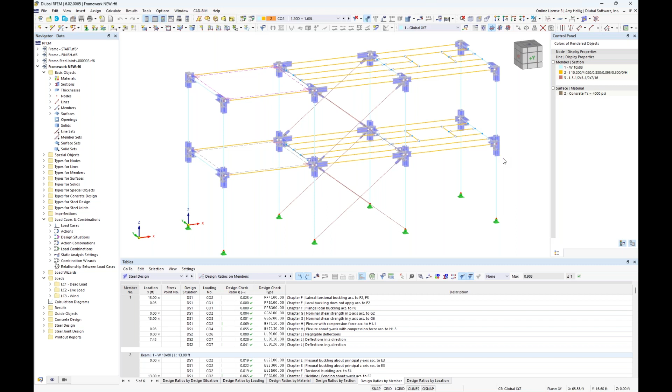If we take a look at one of these particular connections, I'll create a visibility by this selected object, and turn this back into a solid rendered view. When we zoom in, we can see this connection is certainly a bit more complex than what we just saw with our 2D frame.

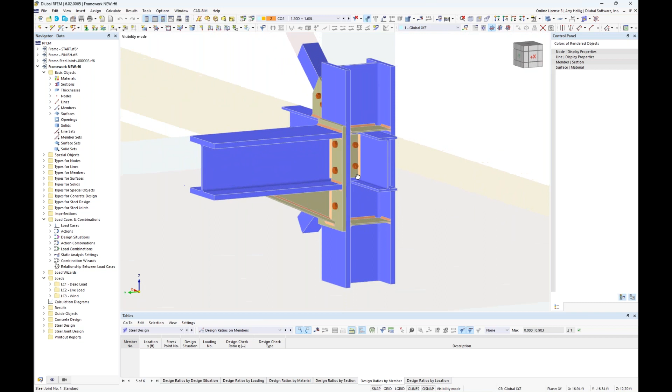We have beams framing into the column in the strong axis, and also beams framing in the weak axis. I've added end plates, haunches, and we have stiffeners shown here. So quite a bit more going on.

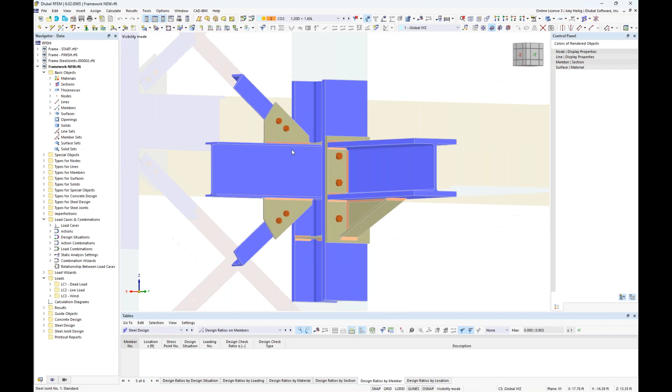If we rotate over on the right-hand side, we also have these tension-only braces framing in, transitioning from these plate elements, and they are welded to the top and bottom flange of my beams. So we can carry out the full connection design here as well.

I'll zoom out and rotate this back around. Under the steel joint design, you can see the design ratios for each of these nodes carried out. We have 3 design checks here for our plates, bolts, and fillet welds, all encompassing an FEA submodel shown for each one of these connections.

We also carried out the steel design—all of these steel members have been automatically designed according to the AISC. I even took it a step further to design these concrete platforms, carrying out the ACI design considering the reinforcement applied. We see a couple of high reinforcement design ratios shown here, no surprise, due to shear where these platforms connect back to the steel members. All in all, this is an all-encompassing option within RFEM to do multi-material design along with the AISC connection design.

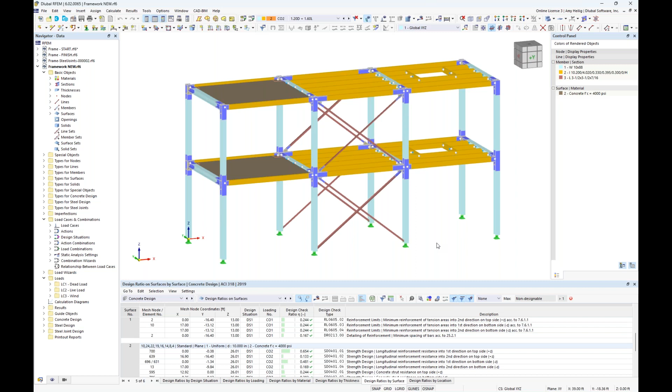Just one more point to touch on: where we're headed with future developments for our connection design. I put together a short list, set up so that the top of the list will be released relatively soon, while options shown at the bottom are longer-term developments. Currently we support all AISC cross sections, and you can even input user-defined parametric sections as well—you're not limited to only the AISC sections.

The only exception to this is round HSS. Currently we support square and rectangular HSS, but round HSS is currently in development and should be released very soon. A preloaded bolt input is also not quite ready, but is currently in development for topics like slip critical connections, so that should be available very soon.

We also recognize the AISC 360 2022 was released, so we'll go ahead and add any updates to the standards. You'll have the ability to design according to the 2016 or the 2022 as soon as we implement that.

Additionally, we are planning to add the ability to export out the true stiffness of this model back to the main structure. This joint stiffness is already calculated with the FEA submodel, so we know this of the connection. Therefore, we can export out that stiffness for the member design rather than having fully fixed or fully released member end releases. We'll be able to account for the true stiffness there.